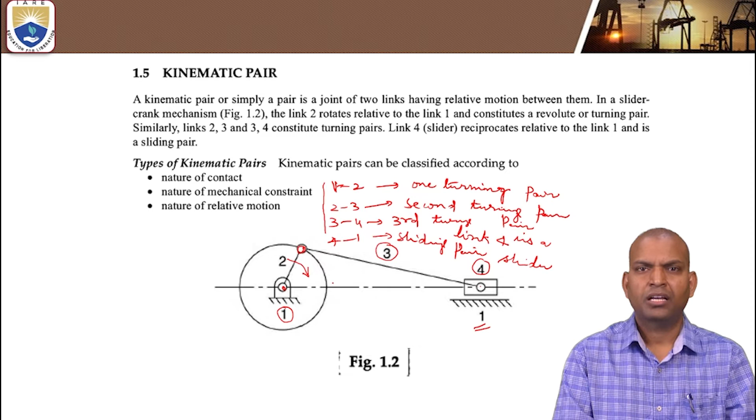And based on the nature of relative motion, there are 6 types of kinematic pairs. Now let us begin with, based on the nature of contact, there are 2 types: number 1, lower pair, and number 2, higher pair.

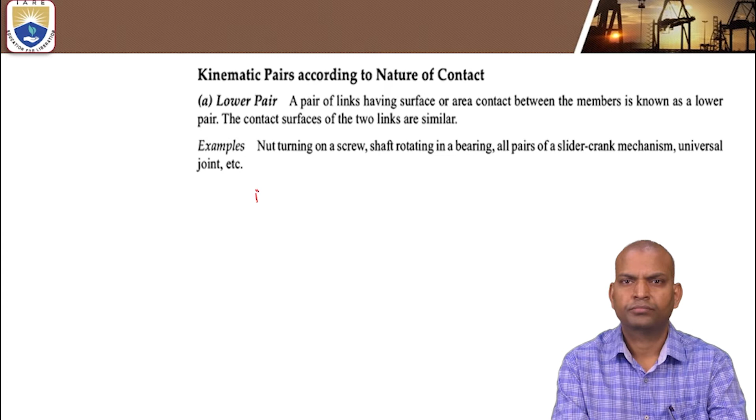Higher pair. Now what does pair mean? Two. It is a joint of 2 links. Okay, it is a 2-link joint, that means a binary joint.

Now, if the contact between 2 links is either surface contact or area contact, then that pair is called a lower pair.

So the contact surfaces of the 2 links remain the same, it is similar. Suppose you are clapping, there are 2 hands. If you clap, the contact between them is considered, according to kinematics, as 1 link. The second hand is another link. The contact between the 2 links, the 2 hands, is surface contact. How much link 1 touches link 2 remains the same or similar, there is no change at all. That's why it is known as a lower pair.

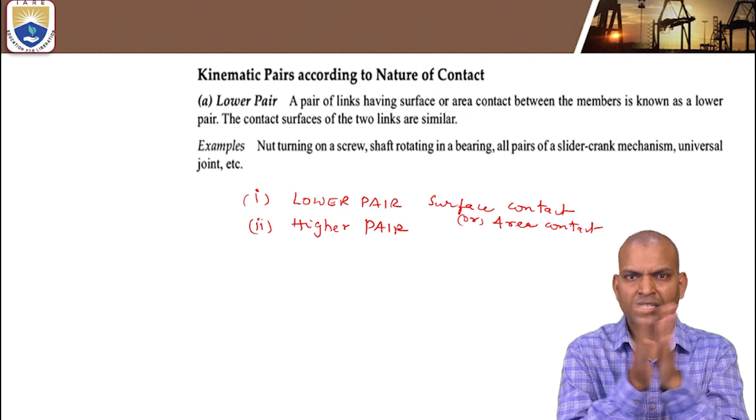So when people clap, what type of motion is it having? The surfaces are contacting each other. Then it comes under lower pairs. Suppose the contact is surface contact or area contact, where does this happen? This type of lower pairs.

The examples of lower pairs are a nut turning on a screw, and a shaft rotating in a bearing, whatever bearing it is, a journal bearing.

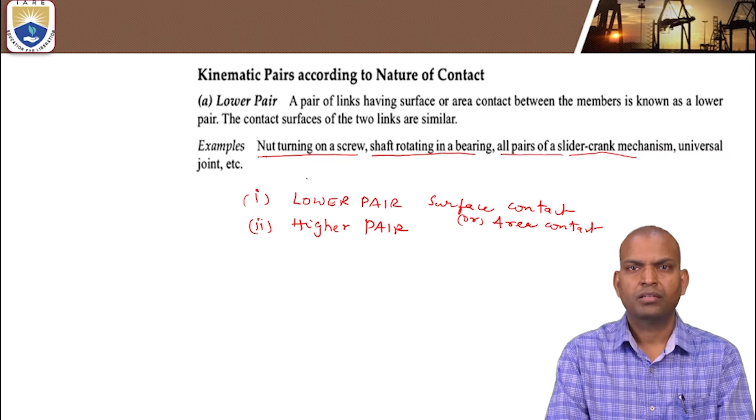Next, all pairs of slider crank mechanism. And finally, universal joint. These are all comes under the category of lower pairs.

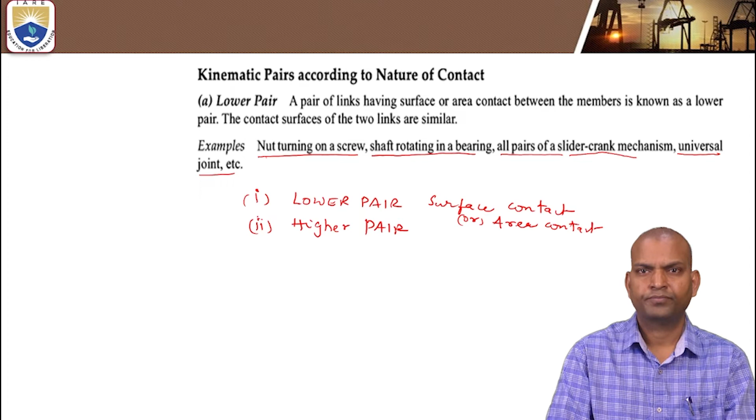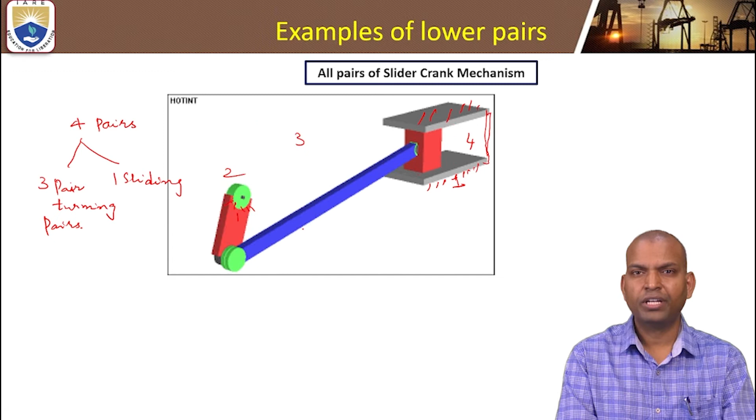In order to calculate the degree of freedom of mechanisms, or to do kinematic analysis of any mechanism, this is a very, very important concept. Parts may be different, but we always do analysis in kinematics based on whether the link is under motion or not. If the link is under motion, we consider it a separate link. If the parts are different but don't have any motion, we consider those parts in kinematics as fixed links.

Okay next, this is another concept of slider crank mechanism. Here the input is the slider we are giving, how it is motion in relation to the crank. The slider and crank have relative motion with each other through the link of the connecting rod. The crank is rotating in a circular direction, complete circular motion, and the slider is sliding, having reciprocatory motion.

So this mechanism, where will it be used? It will be used where there is a requirement of converting reciprocatory motion to circular or rotary motion, or converting rotary motion to reciprocatory motion. At that place, we are going to use this slider crank mechanism.

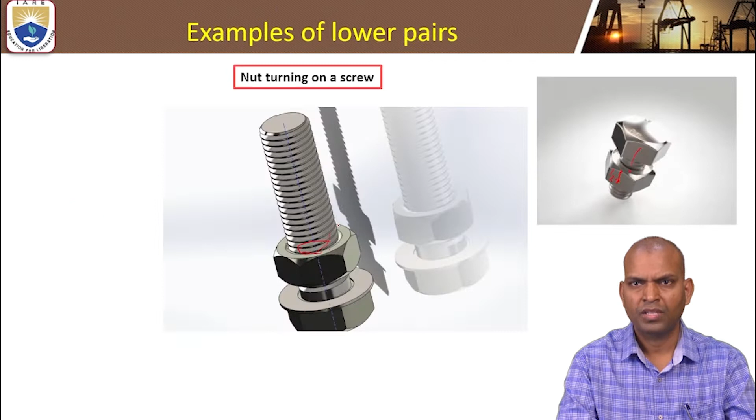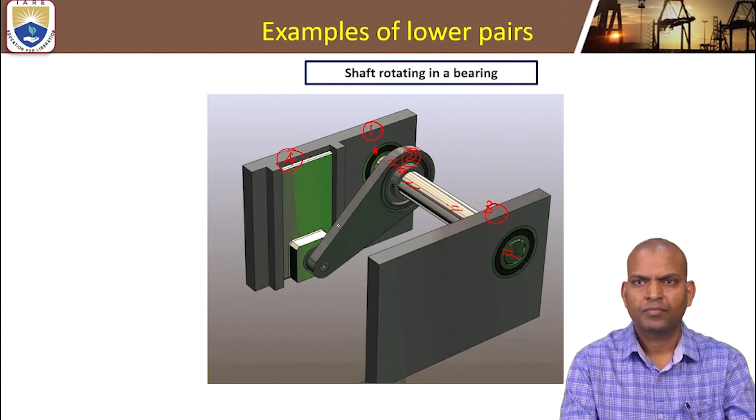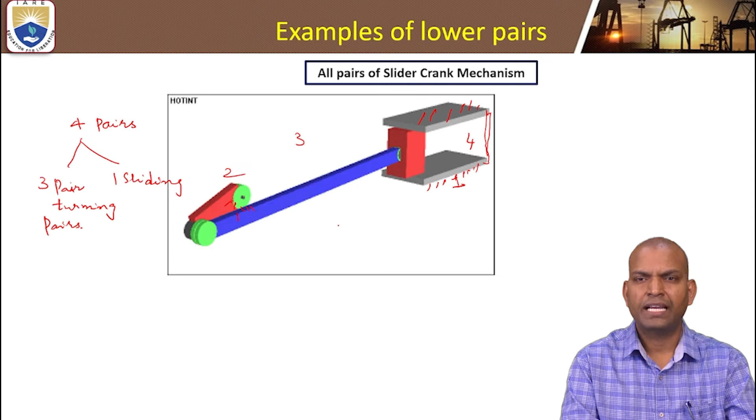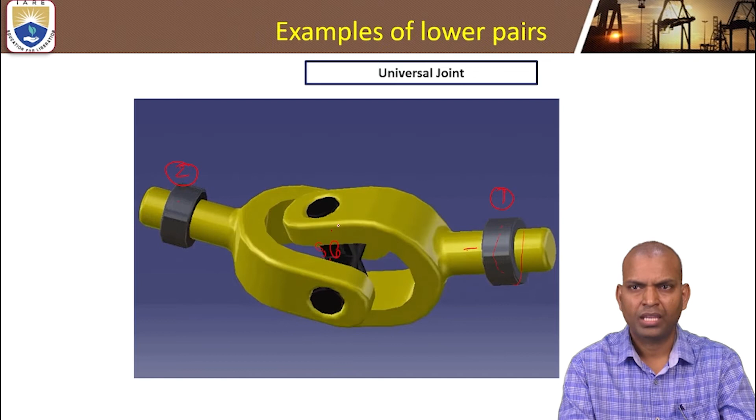So these are the examples of lower pair. What are the examples? Let's recall: number one, a nut turning on a screw. Second example is a shaft rotating in a bearing. The third example is all pairs of a slider crank mechanism. And the final example is the universal joint. These are some examples shown to understand the concept of lower pair. You can think of different examples in day-to-day life.

Suppose you are sitting on a chair; the contact between the chair and your body is a surface contact. The contact between the person sitting and the chair is, if you understand it, a surface contact. It is another kind of category - it is lower pair. If you are clapping, that also comes under lower pair.

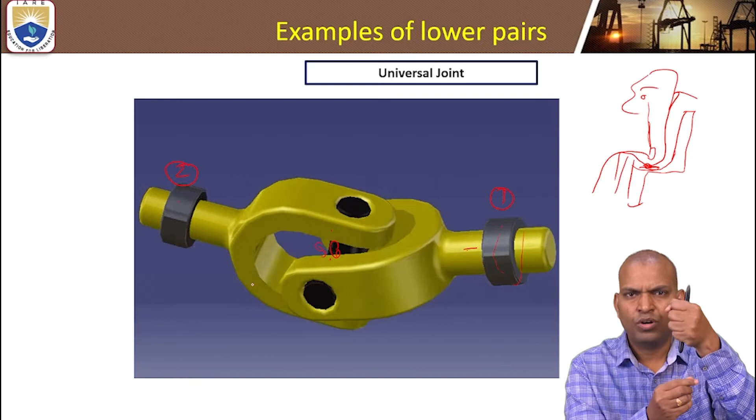If you are holding a rod, suppose I am holding a circular rod when traveling in a metro train, what happens? The contact between your hand and the part of the train - that comes under lower pair.

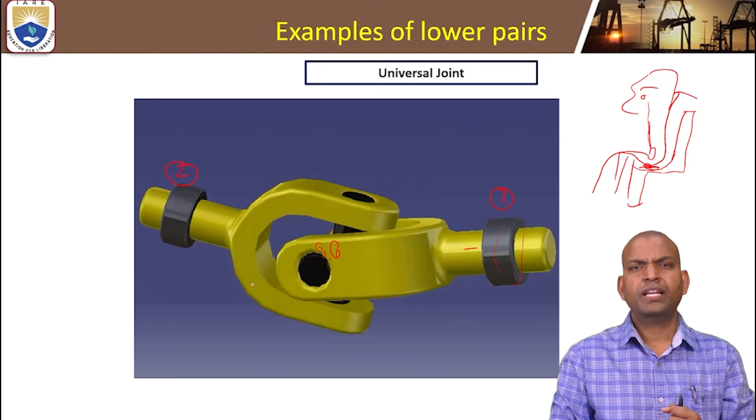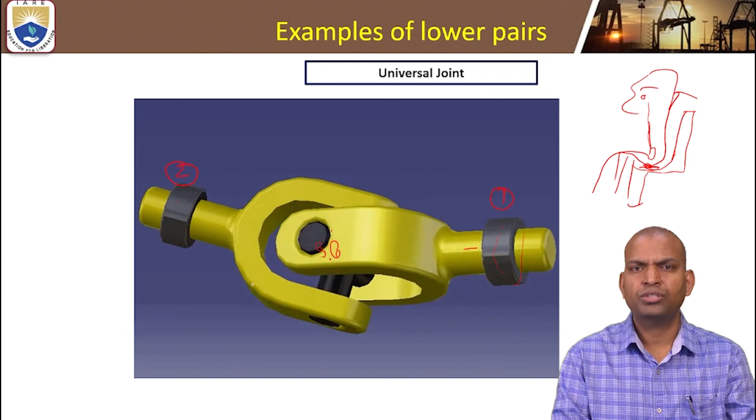If you think carefully, the coefficient of friction is high in the case of lower pair. Why? Because the contact area is higher in lower pair compared to higher pair. So what is higher pair? Let us see.

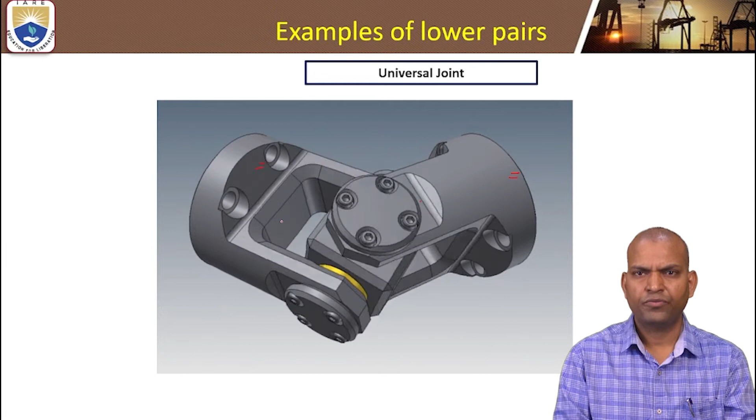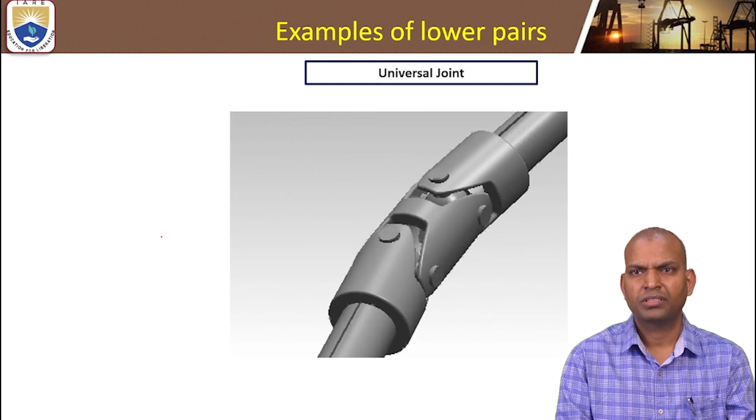This is also another type of universal joint, showing how it transfers motion from one shaft to another when the shafts are on different axes with angles between them. If you see here how the shaft rotates one way, and this is another direction - whenever we want to transfer motion or torque with different inclinations or angles, this universal joint is used without changing the magnitude of the torque.

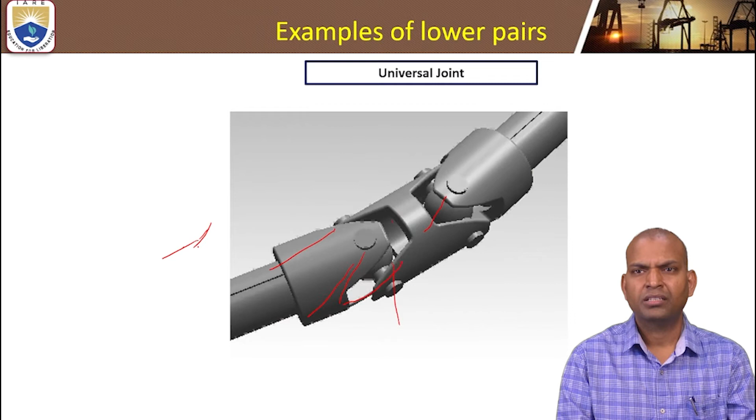Now, coming to the category of higher pair. When a pair has a point or line contact between the links, it is known as a higher pair. The contact surfaces of the two links are not similar - that means they are dissimilar.

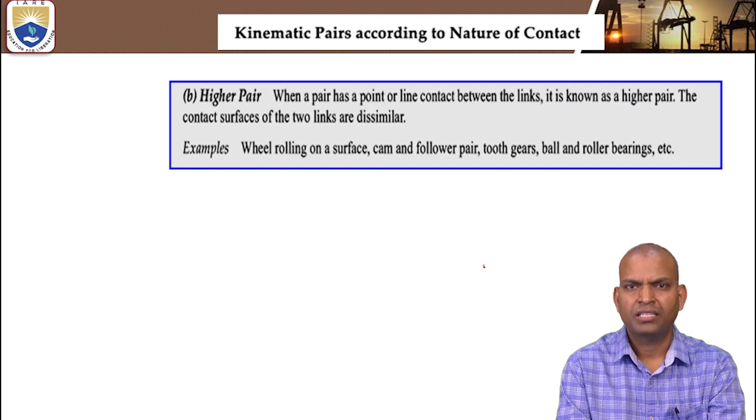When a pair has a point or line contact, suppose there's a ball point - this point marker is touching the surface of the pad. So this ball is in touch with the surface - that is the point contact. There is a fixed link 1 and link 2. The relative motion may be rolling or translational, but the contact remains the same - point contact or line contact. If it is a sphere, it's a point contact, and if it is a roller, then it is a line contact.

Suppose this link 2, the ball, is rotating on the surface - like a wheel. When the wheel is rotating on the road surface, what happens? Through various point contacts, it revolves and rotates on the surface. So this pair, meaning link 1 and link 2, is known as a higher pair.

What are the examples for higher pair? A wheel rolling on a surface, cam and follower pair, toothed gears, ball and roller bearings.

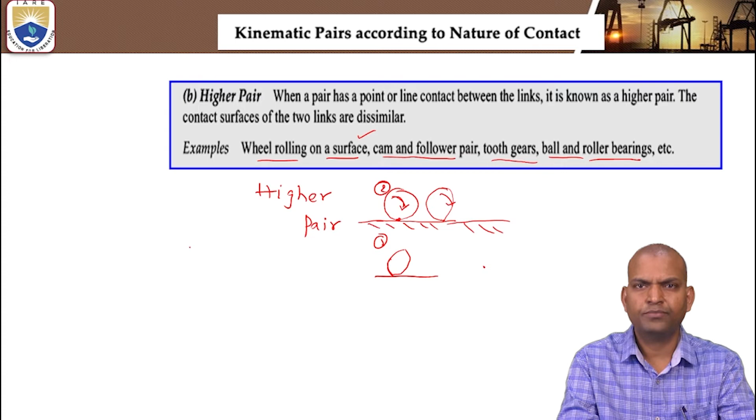How does a wheel rolling on a surface come under the category of higher pair? You can see different types of wheels. Here the contact between the road and the wheel is a point contact. No matter how many thousands of kilometers it travels, this wheel moves with just a point contact on the surface. Now here is another type of wheel, where the contact between the road and wheel is a line contact.

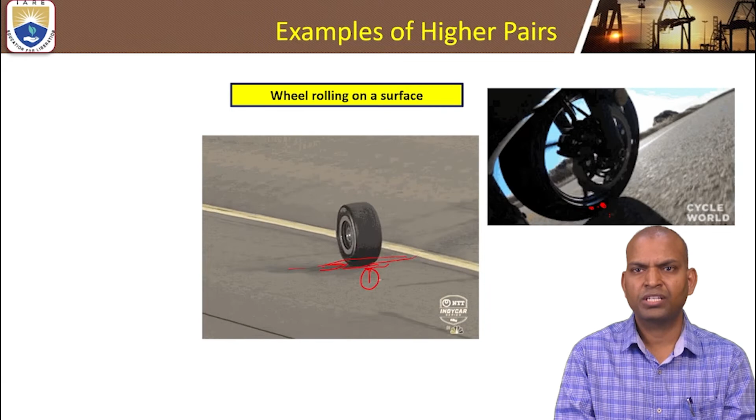In this category, it is point contact; here it is line contact. So if we consider the road as a fixed link and the wheel as a movable link, the motion or pair between them is either line contact or point contact. That's why it comes under the category of higher pairs.

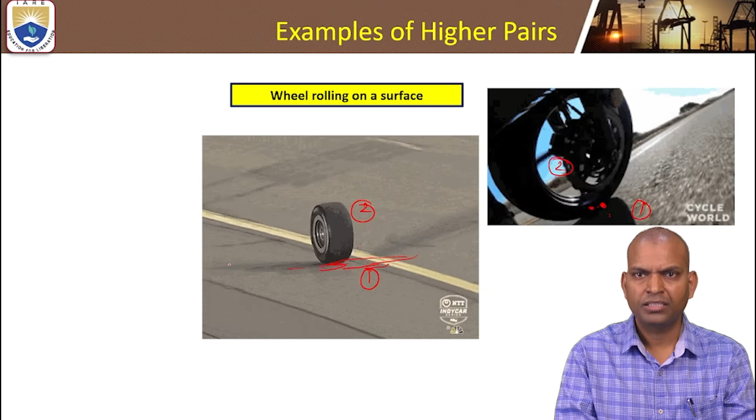Now another example, the cam and roller follower pair. This is very important; we will study cam profiles further in module 4, where we draw cam profiles for various motions of the follower. This part is the follower, and this is the cam.

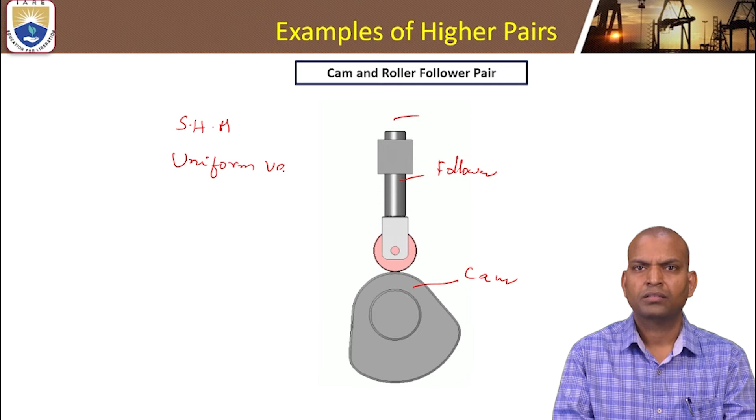The motion between cam and follower can be of various types: simple harmonic motion, uniform velocity motion, and uniform acceleration and retardation.

In this figure, the follower is a roller follower, and the other part is the cam. The contact between the roller follower surface and the cam is a point contact. No matter where on the surface of the cam it is, this contact remains a point contact. That's why the cam and roller follower pair comes under the category of higher pairs.

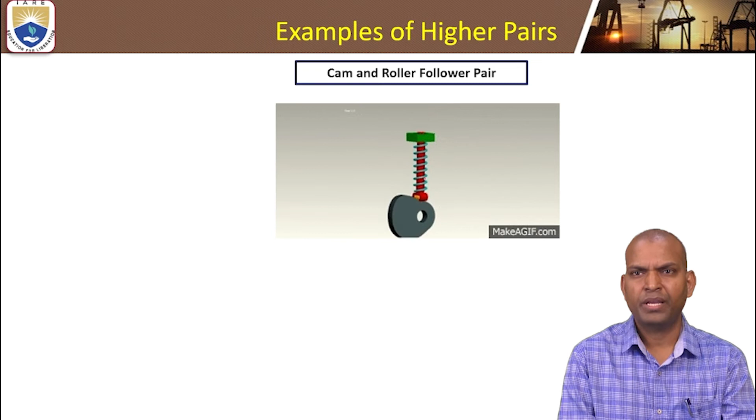Now here again it's a roller follower, and you can see the contact remains the same. But if we consider the contact of the roller to the cam maintained by a spring, based on the mechanical constraint of kinematic pairs, it comes under the category of an unclosed pair or open pair. We'll study this again in the second classification of kinematic pairs.

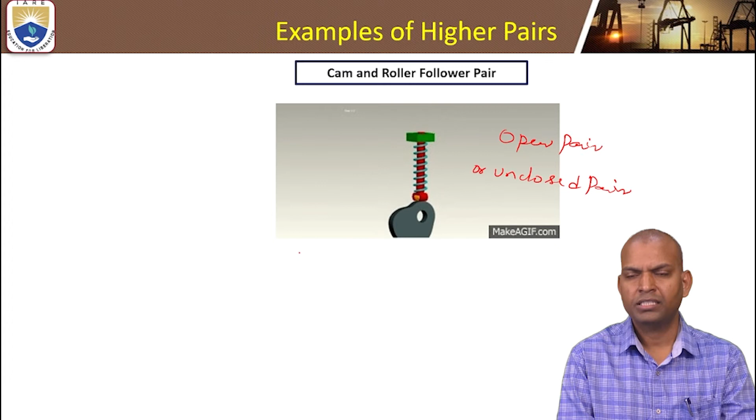But based on the contact between the two links, consider it is link 1 and link 2. The contact between the two is point contact, and that's why it comes under the category of higher pairs.

Here we have the cam with another type of follower, the knife edge follower. The tip of the follower is a knife edge, so the contact between the cam and the knife edge follower is a point contact. That's why it comes under the category of higher pairs again.

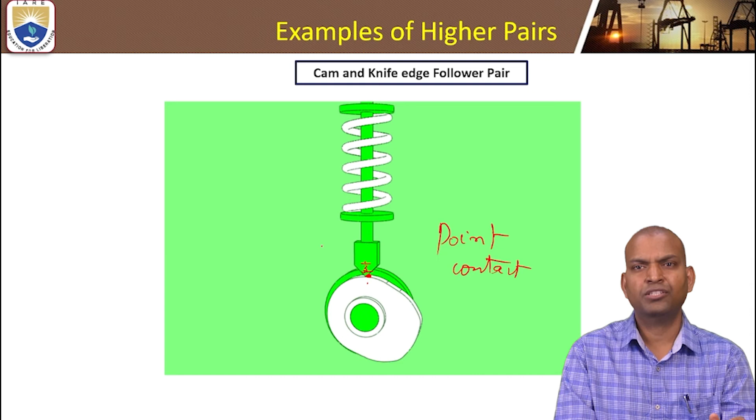Why am I explaining this in such detail? Because it is a very important question for mid exams, CIE 1 continuous internal evaluation exams, and also for end semester examinations. If you thoroughly observe and hear this video, there's no special need to open a textbook again. That's why I'm explaining in detail, to help students understand better. It's very, very important.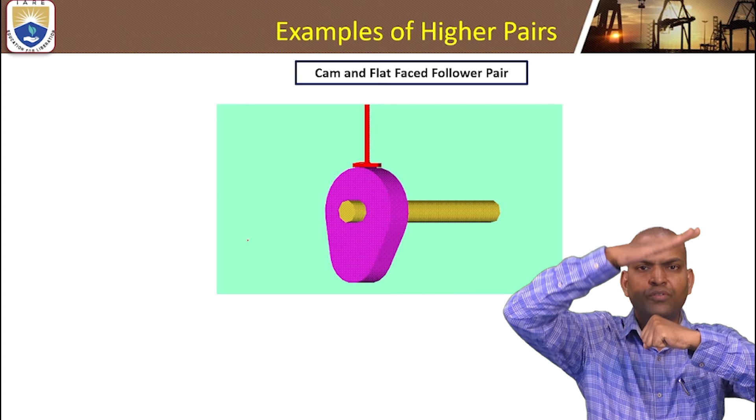So the cam and knife edge follower pair also comes under the category of higher pairs. Now another type of follower has a flat face, so it's called the cam and flat faced follower pair. Even though the face is flat, it is in contact with a circular or curved surface. So the contact between the cam and follower is point contact, which is why it comes under the category of higher pairs.

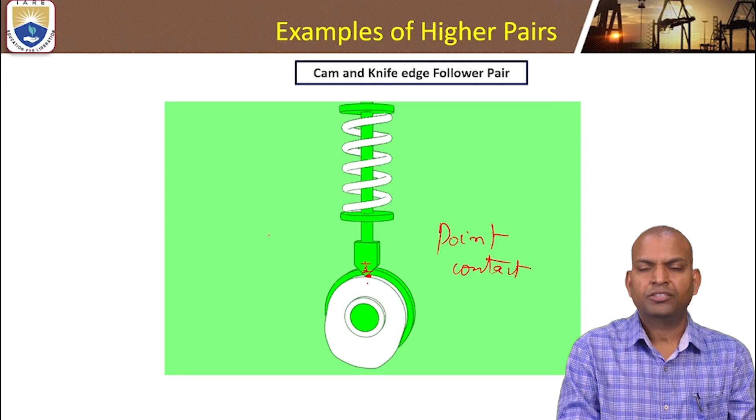So we have studied various types of followers. This is again the flat faced follower, this figure shows the knife edge follower with cam and knife edge follower, and this is the cam and roller follower. These are the three types of followers we'll study again, under module 4, where we'll learn how to draw cam profiles for various followers.

Suppose the follower is a roller follower, and we need to draw the cam profile. One more condition is that the follower can have any of these three motions: simple harmonic motion, uniform velocity motion, or uniform acceleration and retardation motion, or any combination of two.

When the follower is rising, the cam has certain motion input. When it rises with simple harmonic motion and there is a constant radius of curvature, at that time the follower doesn't have any motion. It dwells, remains dwelling, then comes down for the rest of the angles.

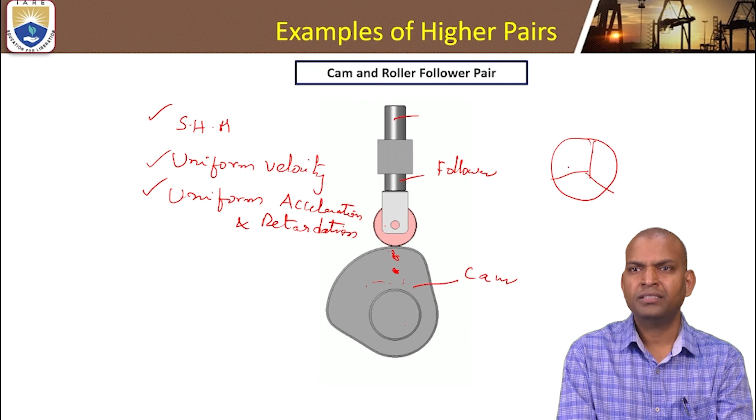So the circle of motion of the cam is divided into different parts. In a simple manner, one is the angle of rising - a certain angular portion where the follower will rise. That is called the angle of rising or rise angle.

At certain angles theta 1, theta 2, and theta 3, the cam has different angles. At theta 1, what happens? It will rise - that's the angle of rise. The remaining portion stays there, it remains constant - the radius remains constant. That is called the angle of dwell.

The remaining portion, 360 degrees minus theta 1 minus theta 2, equals theta 3. This angle theta 3 is the angle of fall, which can be simple harmonic, uniform velocity, or uniform acceleration. Under these conditions we have to draw the cam profile - the shape of the cam. That will be studied in detail in module 4.

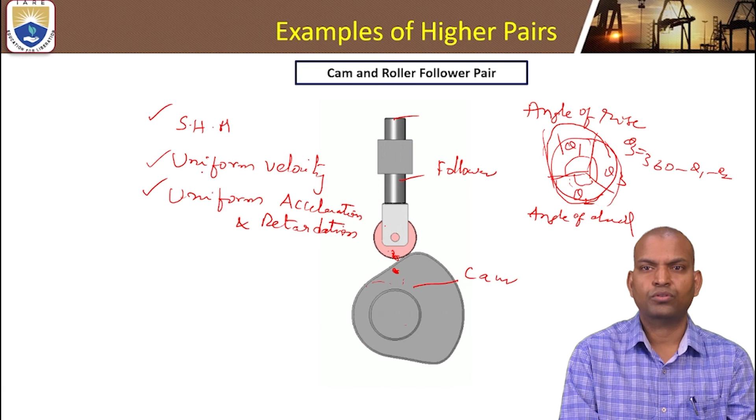Now coming to another example of higher pairs: the toothed gears. There are various types of gears. This is the spur gear - it looks like this in the real field. This type of gear has teeth, and if you see the tooth shape, it has straight edges with no inclination.

The same spur gear can contact another spur gear - then it's called spur gears. The contact between two spur gears, how it looks - the teeth have curved surfaces, and another tooth also has a curved surface. The contact between two curved surfaces is point contact. That type of pair is known as higher pairs.

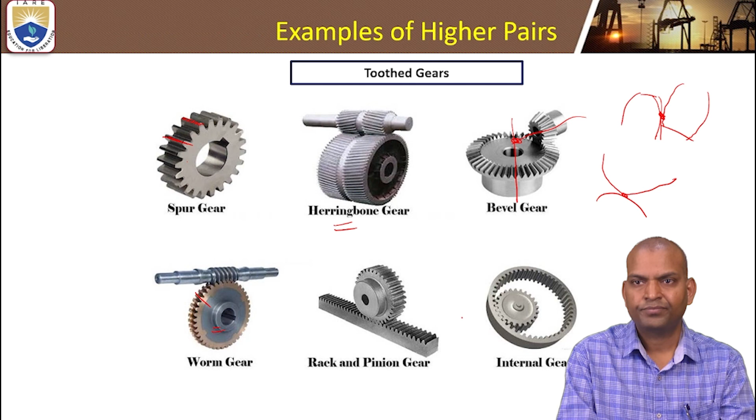Another category is the herringbone gear - it is double helix. There are bevel gears with the angle at different angles, bevel gears perpendicular or normal too, and worm gears - you can see worm gears look like that, with inclination. There is also rack and pinion gear and internal gear.

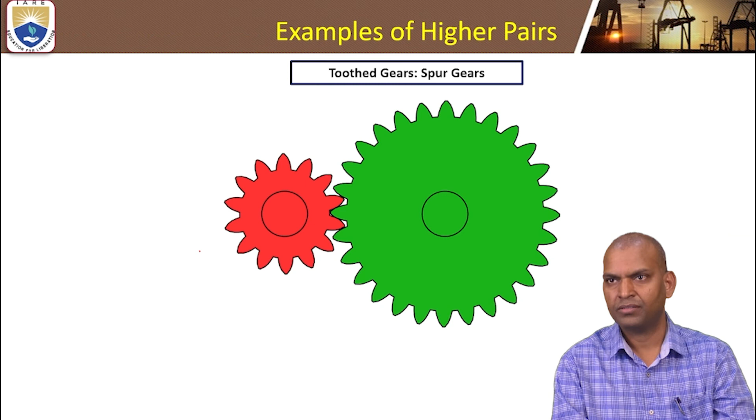The motion between two spur gears is point contact, which comes under the category of higher pairs. Then there are worm gears - the motion between them also comes under the category of higher pairs.

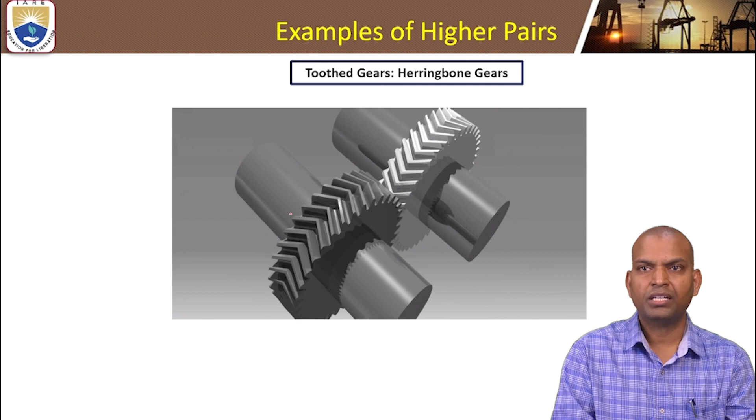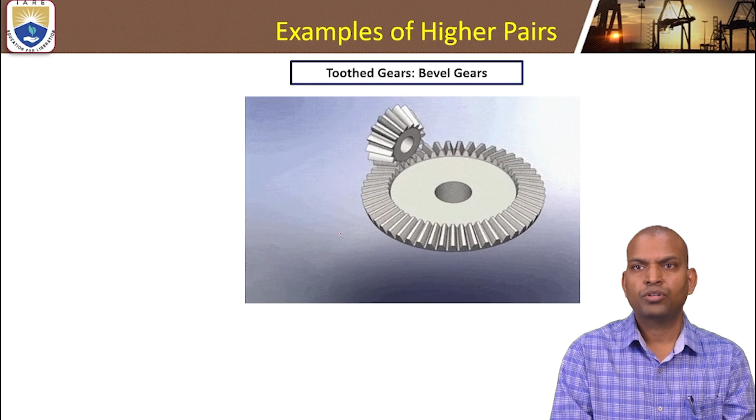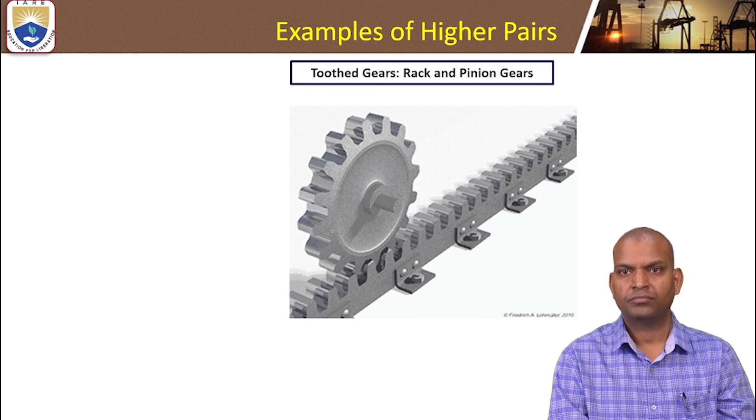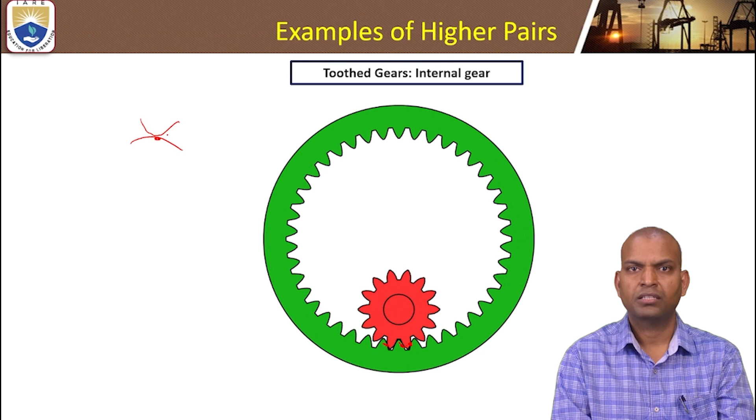This is internal gear contact. The internal gear has contact between two teeth which is again point contact - along the line it becomes a line contact, but with the two curved surfaces, it is definitely point contact. That's why it comes under the category of higher pairs.

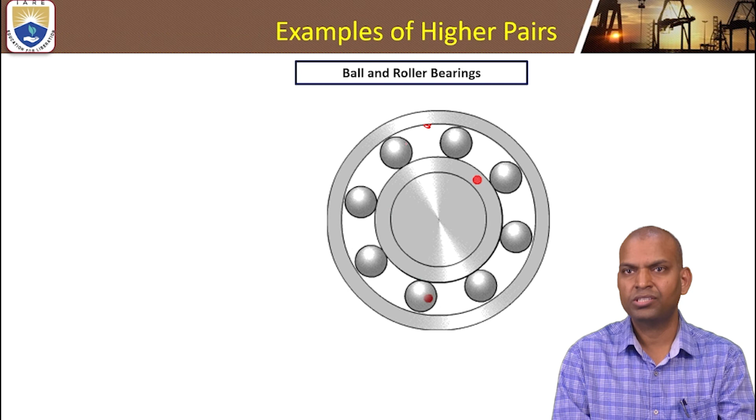This is ball and roller bearings. You see the ball contact - the inner surface touch is higher pairs. The roller, you can see how the rollers are in touch - the contact between the roller and outer race is line contact, so it comes under the category of higher pairs.

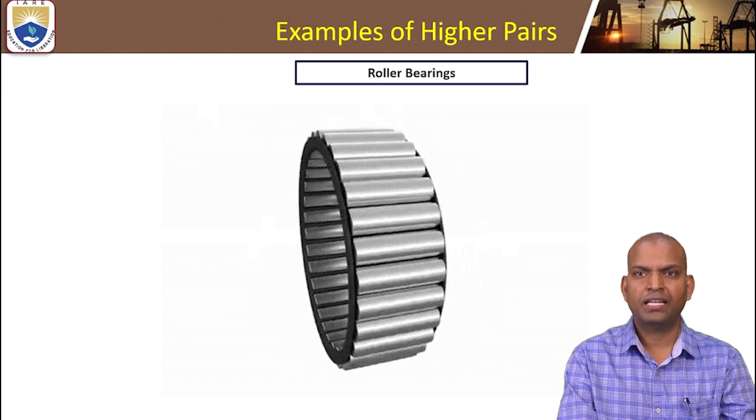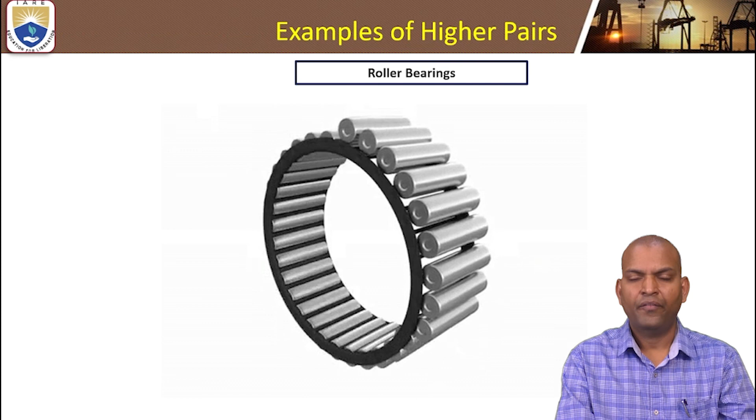So in this class we studied in more detail the classification of kinematic pairs based on the nature of contact - that is higher pairs and lower pairs - with detailed animated examples.